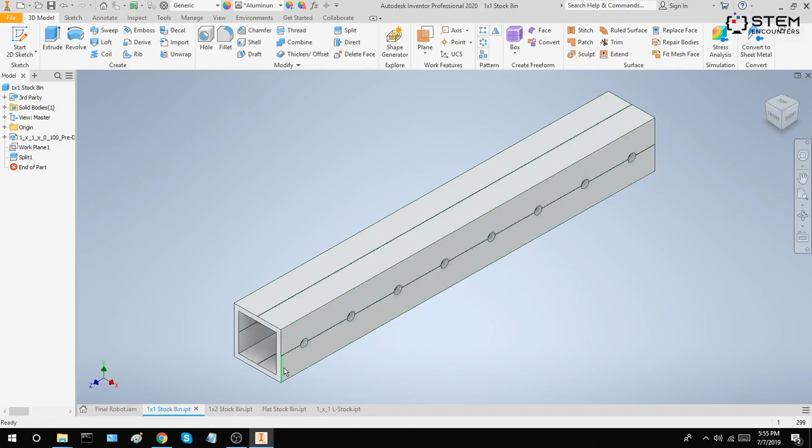There's also 1 by 2 stock, which is stock in a rectangular tube that's 1 inch by 2 inch. There's flat stock, which is a flat strip of aluminum with a little width of 1 inch. And there's also L stock, which is aluminum in the shape of an L.

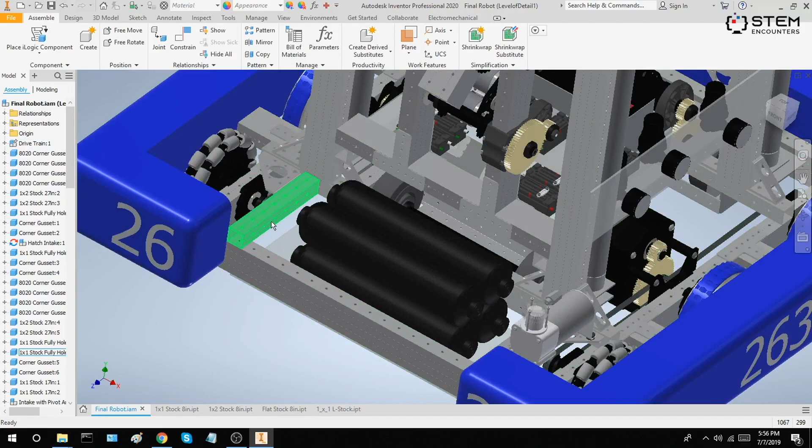Now, if you take a look at our FRC robot, you'll notice that a lot of the robot is made up of stock, because stock forms the structural basis of all of the robot's mechanisms. For instance, you can see here there's a piece of 1 by 1 or square stock. There's a lot of 1 by 2 stock for this arm pivot. And up here, there's more 1 by 2 stock. And you'll also notice that there are some pieces of flat stock here.

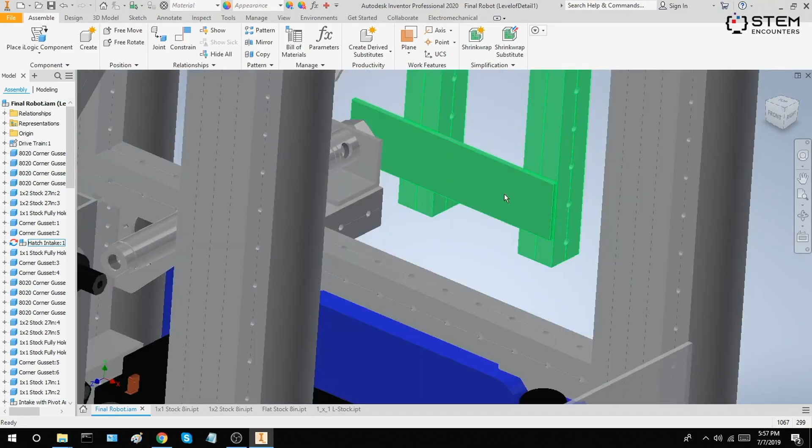To connect stock together, we use gussets, which are pieces of aluminum that can get bolted to 2 or more different pieces of stock to form a connection. You'll notice that these little holes in the gusset line up with the holes on the stock so that bolted connections can be made. There are many different types of gussets which serve different purposes.

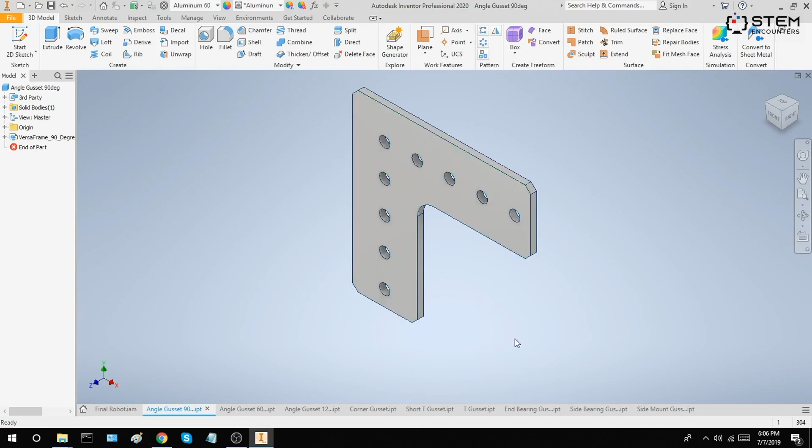This is an L gusset, or a 90-degree angle gusset, and this serves to connect 2 pieces of stock at a 90-degree angle. Head over to our robot, you'll notice that these 2 stocks are connected at a right angle by this L gusset.

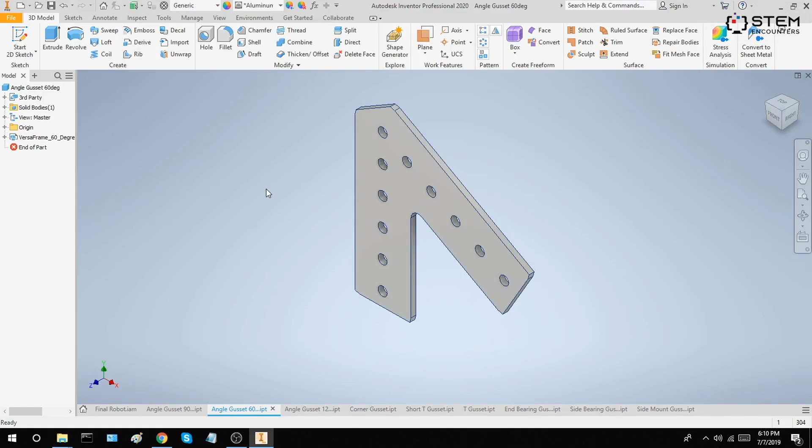Angle gussets can come in a variety of angles, anywhere from 30 to 150 degrees. This, for instance, is an angle gusset that is 60 degrees, and it connects 2 pieces of stock at a 60-degree angle, while this 120-degree angle gusset connects 2 pieces of stock at a 120-degree angle.

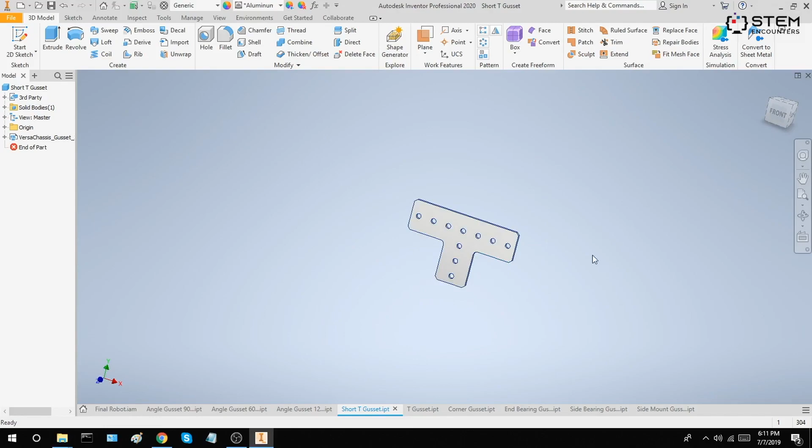Other structural gussets include T-gussets, which connect stock to form a T. This is a short T-gusset, and this is a long T-gusset. And you'll notice on the final robot, T-gussets are used in the drivetrain to connect stock to form a little T shape.

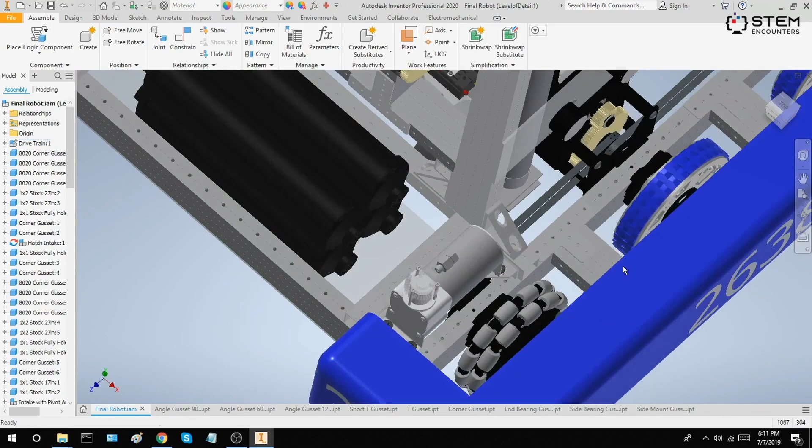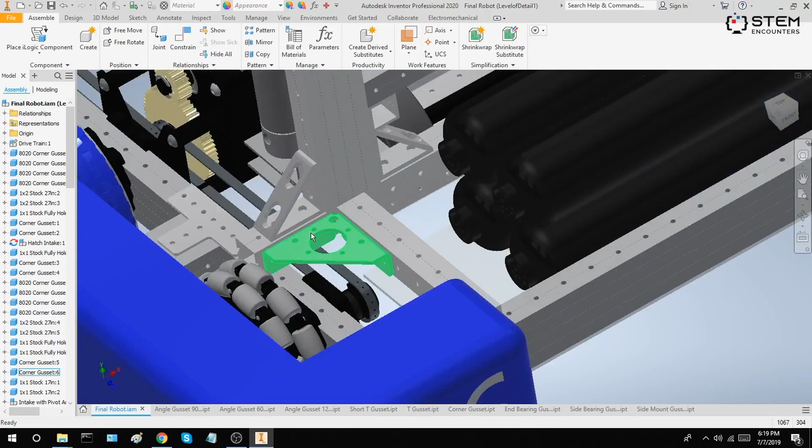A corner gusset, like a 90-degree angle gusset or L gusset, allows structural components to be connected at a right angle. In addition, this little hole here serves as a hole for bearings, which we'll go over. You'll notice on the final robot, for instance, in this area, these 2 stocks had no room to have an L gusset fit on top of them because of this, so a corner gusset was used to connect them, since these holes were facing inward.

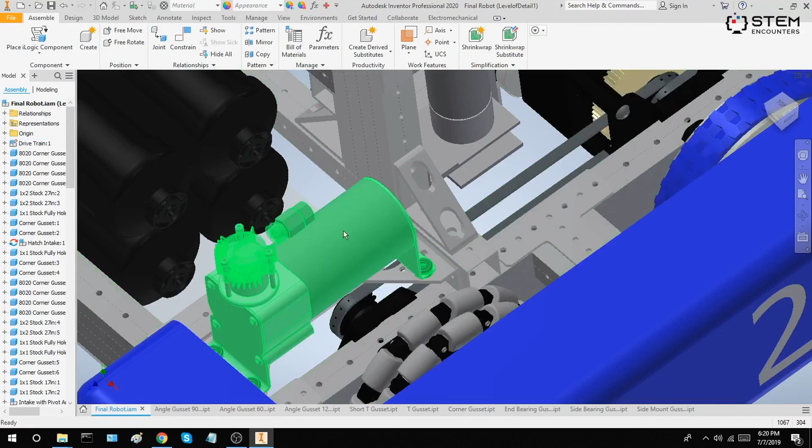In addition, the surface that the corner gusset provides, along with the little holes, allow other robotic components to be mounted on the corner gusset. For instance, over here you'll notice that the pneumatic compressor was mounted on the corner gusset.

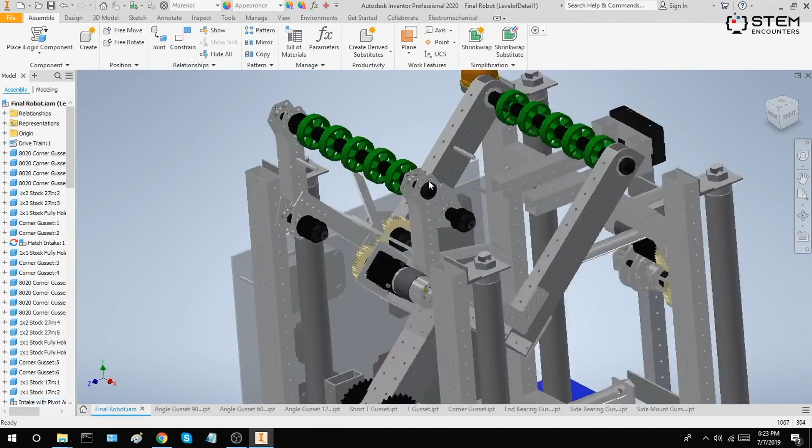Some gussets are also just dedicated to housing rotating components, mainly bearings. You'll notice that this hole in this end bearing gusset is similar to the hole in the corner gusset. And if you head over to the final robot, you'll notice over here, this shaft with all these green wheels has been mounted to the end bearing gusset, which is mounted at the end of a square stock.

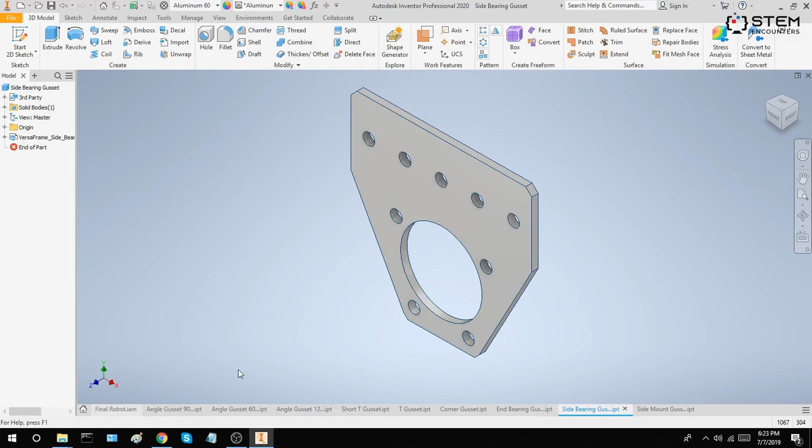A side bearing gusset is similar to an end bearing gusset in that it houses a bearing in its big hole, except that it mounts on the stock such that the bearing would come off the side of the stock. So over here, instead of the bearing and shaft setup coming off the end of the stock, for a side bearing mount, it would come off the side.

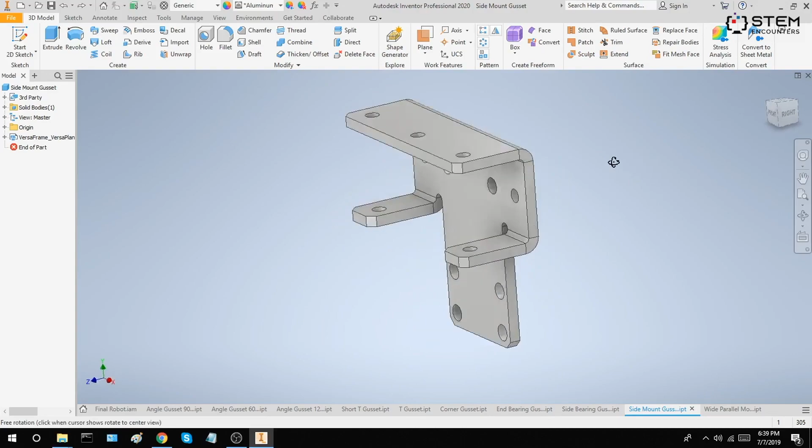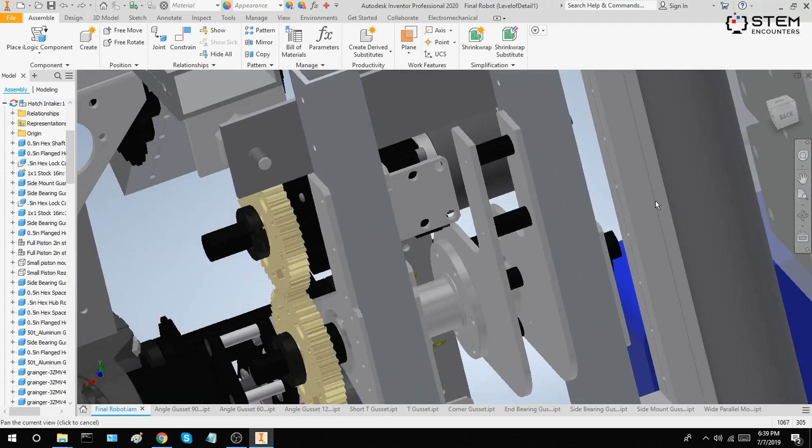There are also gussets that are dedicated to mounting motors. For instance, this VersaPlanetary side mount gusset mounts a motor on this face, and these little parts of the gusset hook onto a stock. So over here in our final robot, you'll notice that the motor here is attached to this piece of stock using a VersaPlanetary side mount gusset, which has its little tabs hook on to the holes of the stock.

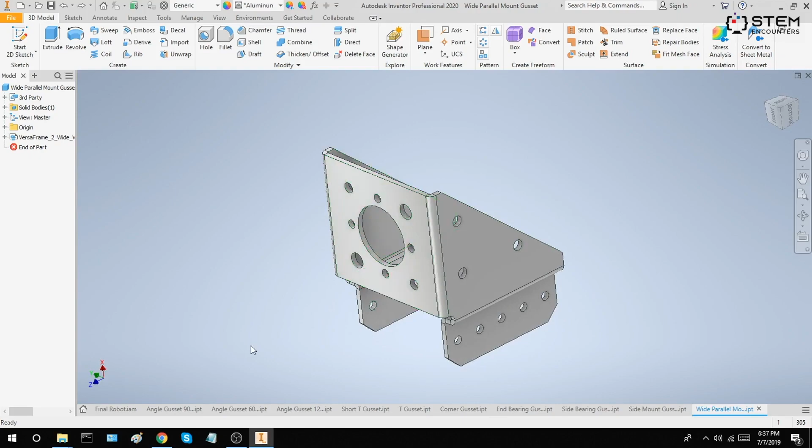There's also a VersaPlanetary parallel mount gusset, which also mounts motors to stock, except that the motor goes in such that it runs parallel to the stock. You'll notice here this little hole is for the output shaft of the motor to stick through. So, for instance, on our final robot over here, you'll see the VersaPlanetary parallel mount gusset with the motor running parallel to the stock that the gusset is mounted on.

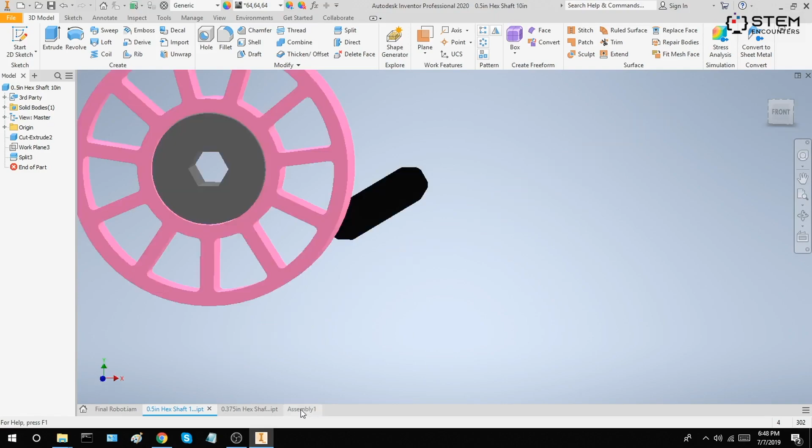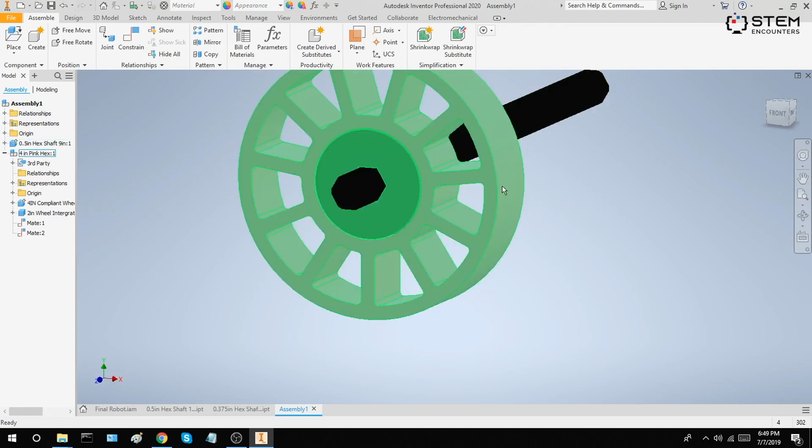Hex shafts are the axles of any rotating parts of your robot. In FRC, hex shafts are commonly used due to the fact that a hex shaft, when used with a hex hole, doesn't require any locking mechanism. So you see here I have a wheel with a hex hole, and if I put it with this hex shaft, you'll notice that because the holes fit right with the shaft, when this axle spins, the wheel will spin right with it without the need for any locking mechanism, as there would be if the hole and the shaft were circular. So you'll notice on our final robot assembly, hex shaft is used right here to form the axle of this rotating wheel component.

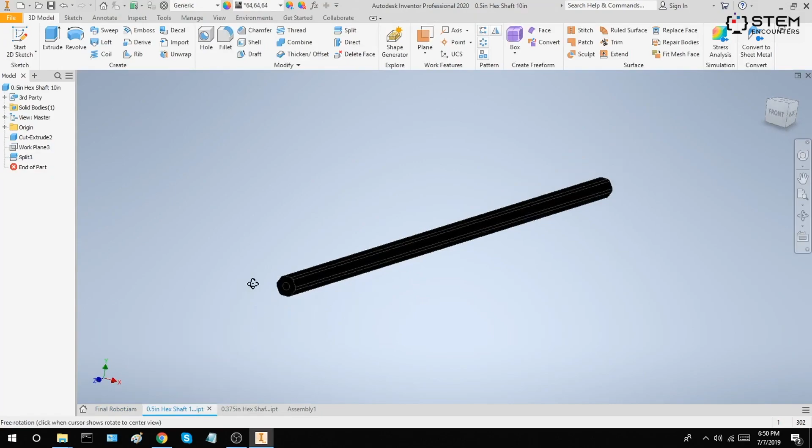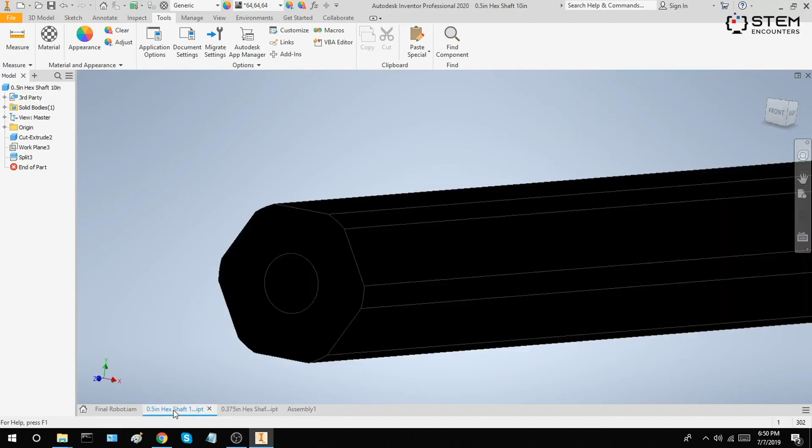And one more thing to mention is that this hex shaft is actually a half-inch hex shaft because the distance between two faces of the hexagon is roughly half an inch. And there's also a 3/8 inch hex shaft, which would have that distance being about 3/8 of an inch. But generally speaking, half-inch hex shaft is used more often on Team 263.

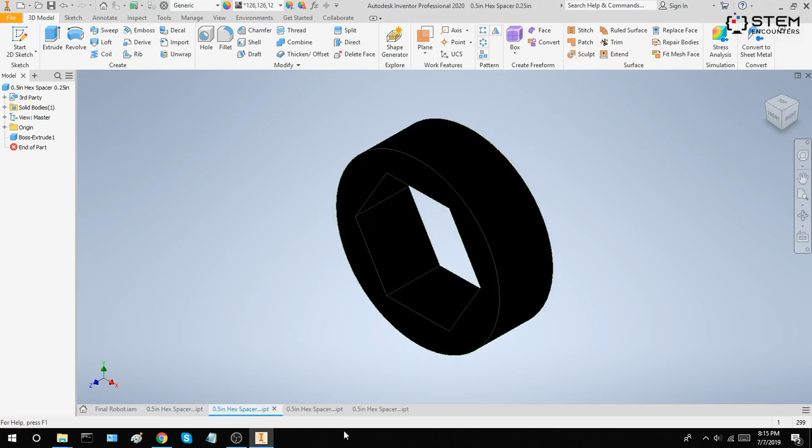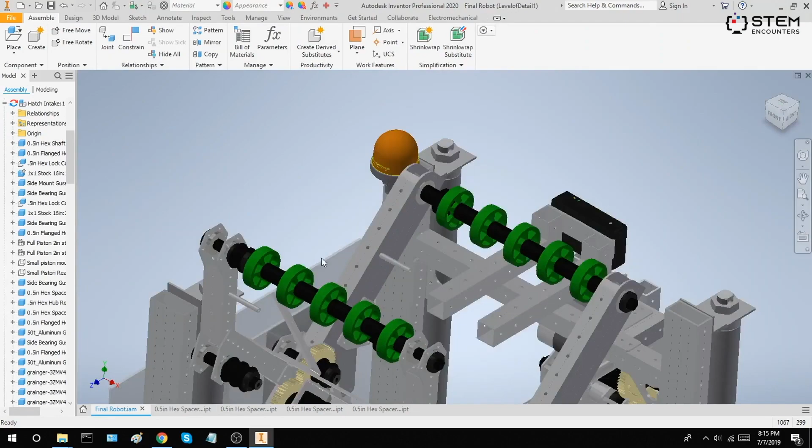So spacers are basically pieces that separate two other parts by a certain separation distance. Say, for instance, this is a half-inch spacer, so it would separate two pieces by half an inch. This is a 1/4 inch spacer, and this is a 1/16 of an inch spacer. So mainly for FRC, hex spacers are used. You'll notice that this spacer has a hex hole, and they're used on hex shaft to separate items on the shaft by a certain distance. So if you head over to the final robot, you'll notice that these wheels have spacers in between them so that they don't slide along and get closer or farther away from each other. They stay in place because these hex spacers kind of lock them in place by a certain distance.

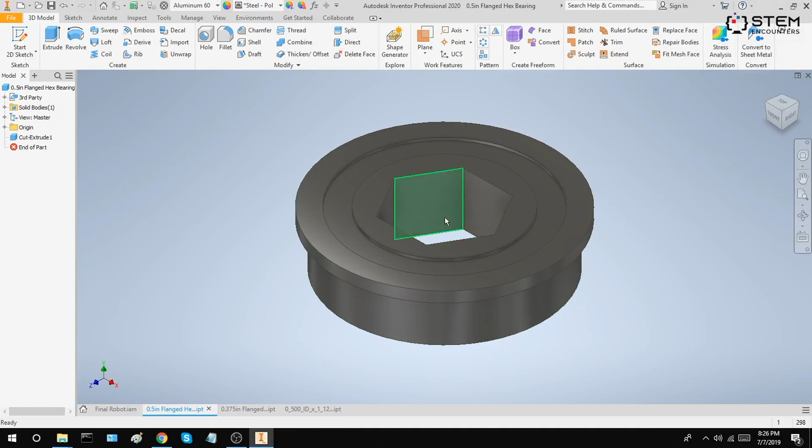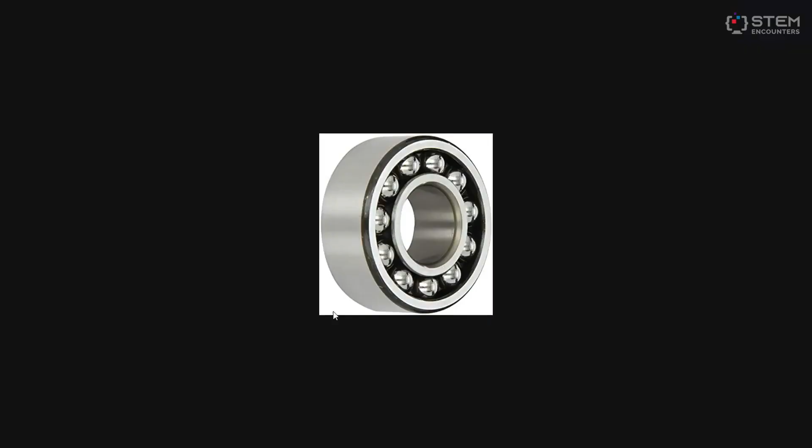So bearings are components that sit in a hole and house a shaft in here, and they basically reduce the friction between the shaft, which spins, relative to the hole, because a bearing is really composed of two parts: the inner part, which can spin freely relative to the outer part. You'll notice in this diagram of a bearing taken apart that the inside component is separate from the outside component, and they're separated by a bunch of balls, which allows the inner ring to spin really easily. And when you put a shaft through this, and you put the entire bearing in a hole, the shaft can spin really easily because of the reduced friction because of all these balls.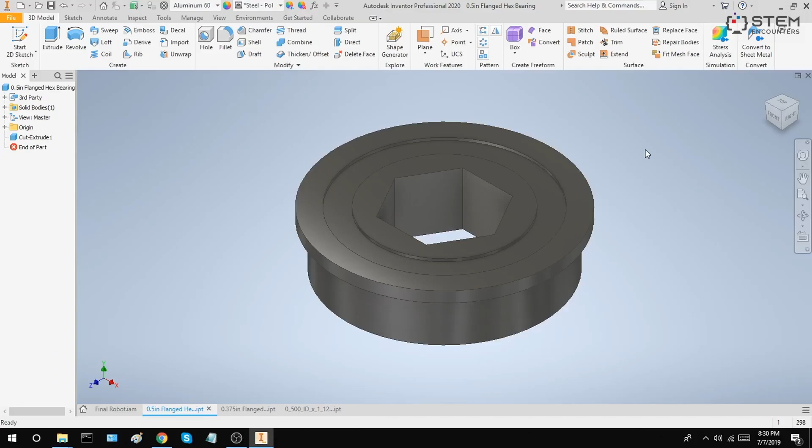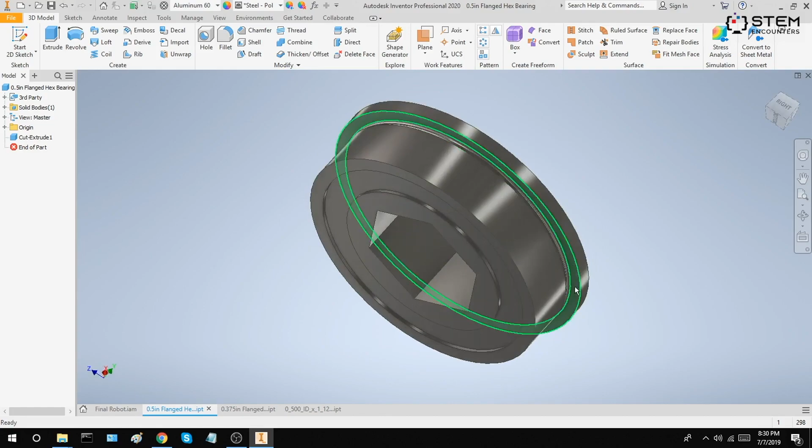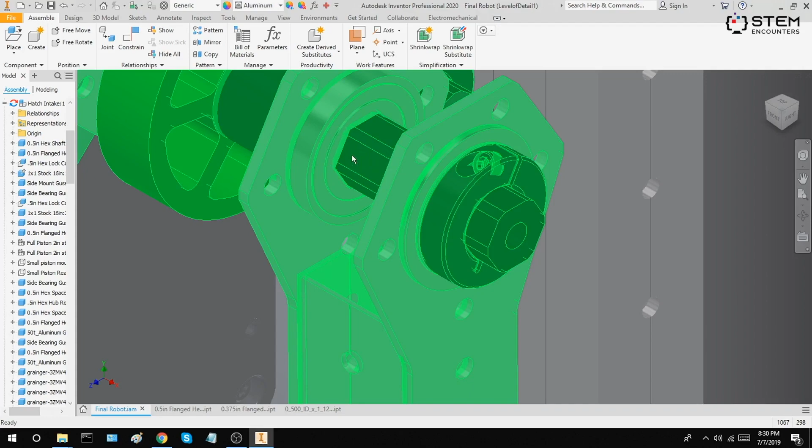Now the most common bearing we use on Team 263 is the flanged hex bearing, which, as you'll notice, there is a half-inch hex hole here, and the bearing is flanged, meaning that it has a little lip here that goes around the outside so that when this bearing is placed in a hole, the lip catches the surface of the hole so that the bearing doesn't fall all the way through. On the final robot, you'll notice by this side mount gusset, underneath this black component, there is a bearing here, and there's also a bearing on the other side over here. And the hex shaft sits inside the bearing, and it can rotate with much less friction because of the bearing.

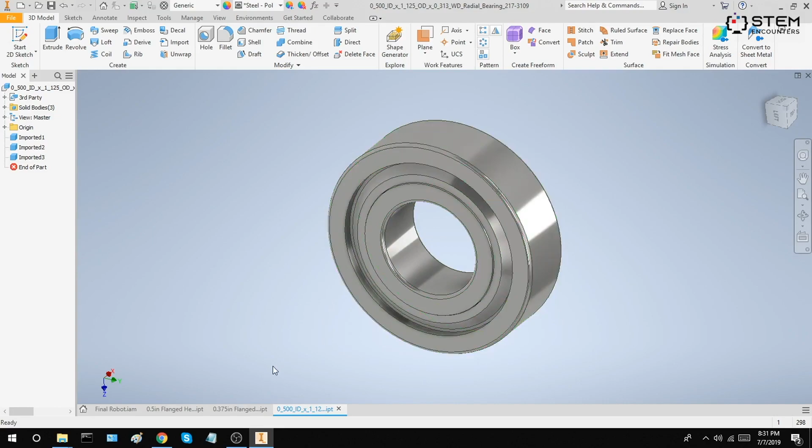There are also bearings that don't have a hex hole. For instance, this bearing has a 3/8 inch diameter regular hole, and there are also bearings that don't even have a flange, such as this bearing. You'll notice that it no longer has the lip that is the flange of the bearing. But most commonly used on our team is this flanged half-inch hex bearing.

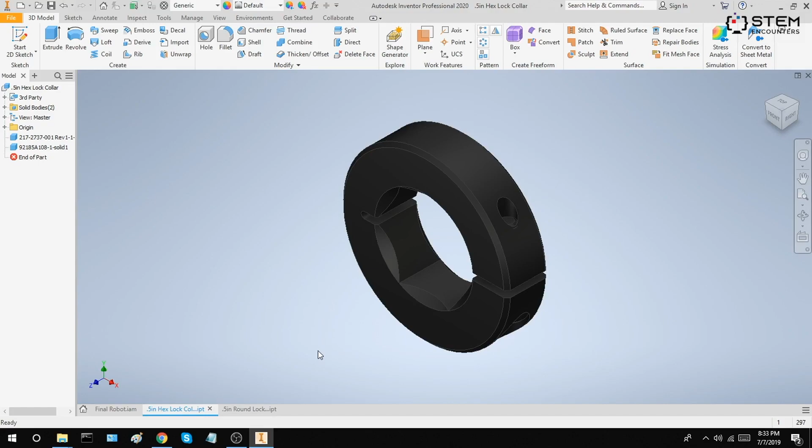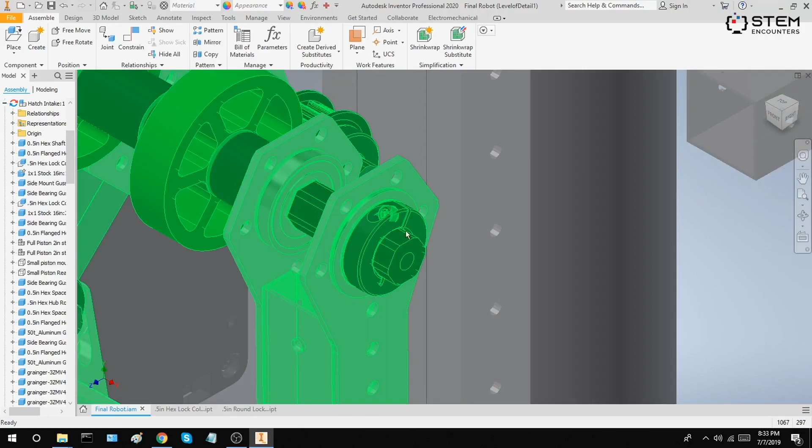Lock collars are little rings that sit on a shaft, and when tightened, they do not slide. So you can imagine that they can be used to sit on shafts and surround other components on the shaft, and when tightened, they'll lock those components in place and prevent them from sliding. There is a hex lock collar, which has a hex hole and sits on hex shaft. There's also a round lock collar, which sits on round shaft, but most commonly for FRC Team 263, we use the hex shaft lock collar. And you'll notice on the final robot, this shaft is surrounded by a lock collar on this side, as well as a lock collar on this side, so that the shaft doesn't slide out of the gussets that way. It's locked in place so that everything stays put.

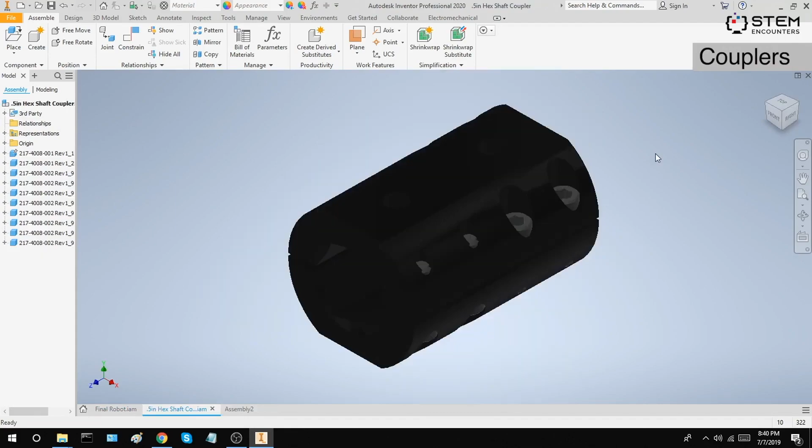Couplers are used to connect or couple two hex shafts together. And you'll notice that on the side there are these screws here, and when you tighten these screws, the coupler can lock onto two hex shafts.

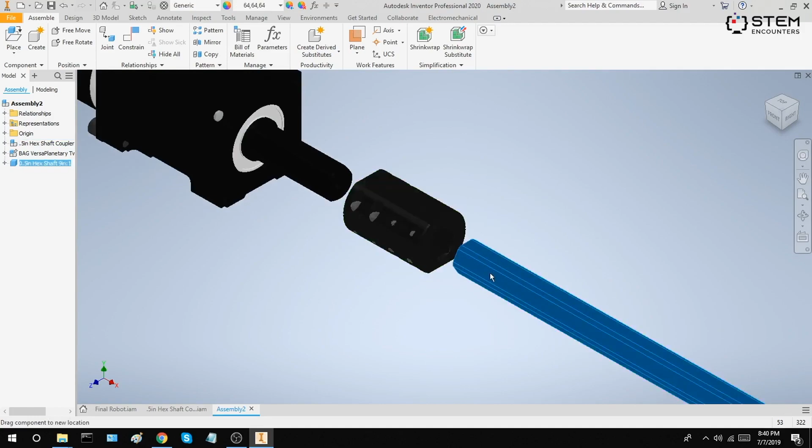So if you notice, I have a motor here with a hex shaft, and I have another hex shaft. I can stick part of the hex shaft into the coupler and the other hex shaft into the coupler, and when I tighten these screws, the coupler bites down on both of these hex shafts, and by doing that, this shaft is now extended in a way, because these two shafts are connected by this coupler.

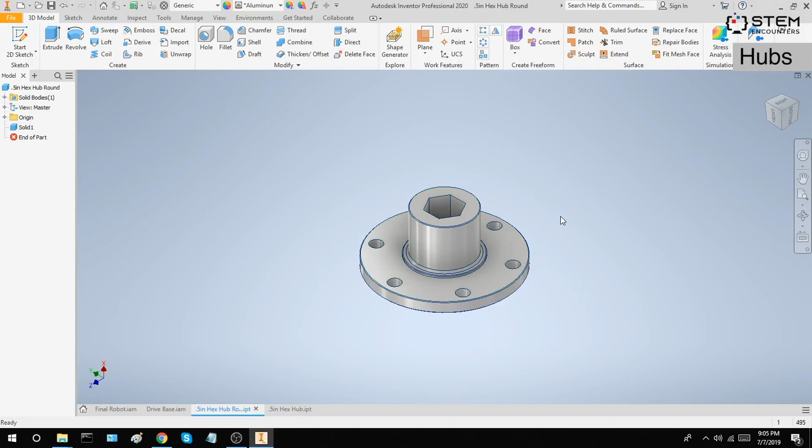Hubs are components that connect shafts to a bigger component so that the bigger component rotates with the shaft. You'll notice that this hub in particular has a hex hole for a hex shaft, and it has these mounting holes that can connect to a bigger component so that everything rotates together.

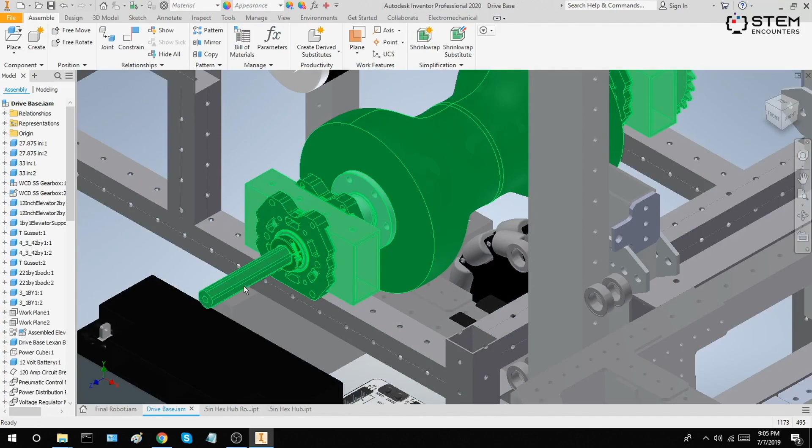This is also another hex hub. And over here you can see that this hex shaft connects to the hub, which connects to this yo-yo looking component, so that the entire yo-yo looking component rotates when the hex shaft rotates because of this hub.

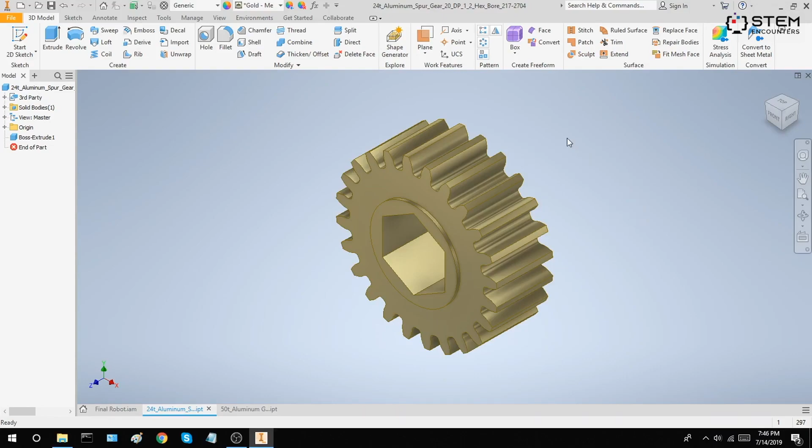Gears transfer rotation along different parts of the robot, and gears are placed on shafts, and their teeth are supposed to mesh with other gears to transfer rotation. And one thing to mention is that gears are identified by the number of teeth that they have. So, for instance, this is a 24-tooth gear, and this is a 50-tooth gear.

And on a robot, you can see that gears are used to transfer the rotational movement of this motor to the rotational movement of this arm. And you can see here on the robot that gears are used to transfer the rotation of the motor to the rotation of this arm.

Another good thing to mention is that gears meshed together will rotate in opposite directions. So for this motor, when it spins, let's say it spins clockwise, then this arm will rotate counterclockwise.

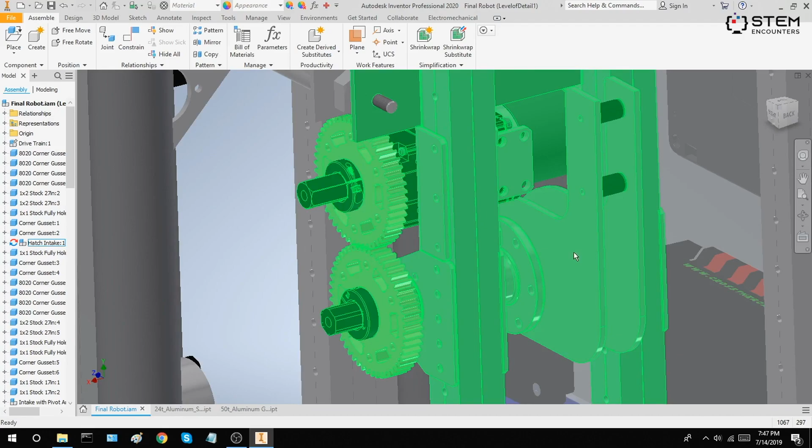Motors turn electrical energy into rotational movement. So for this motor, the electricity comes into these two wire terminals, and the motor turns that electricity into the rotational movement of this output shaft. There are many different types of motors that you'll be using in FRC.

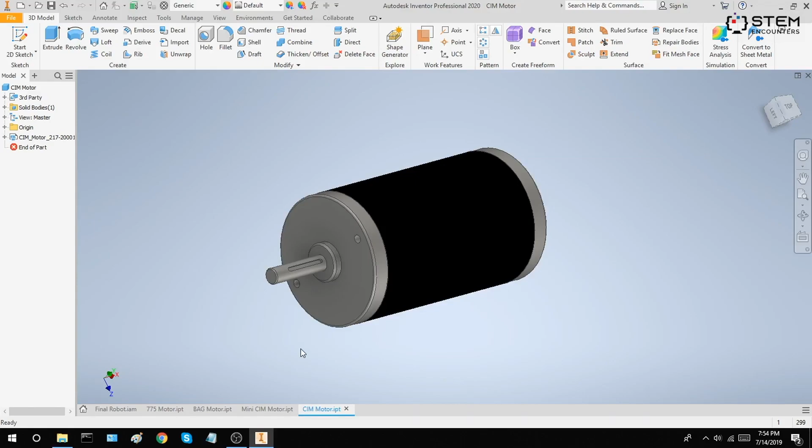This is a CIM motor, which is one of the bigger motors you'll use for any situation where you need a lot of torque or rotational force. This is a mini CIM motor, and this is a BAG motor, and those are used for situations where you need less torque or rotational force. This is a 775 motor, which is smaller than a CIM.

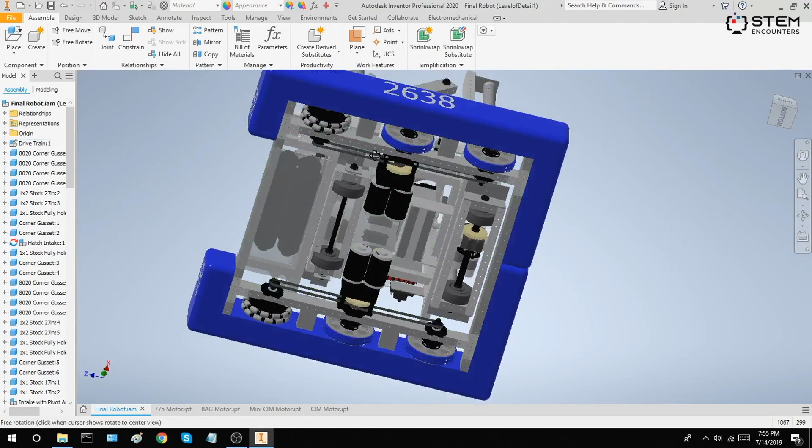You can see on our robot that there are motors everywhere because they power a lot of the mechanisms and a lot of the movement on the robot. Down here, you have many CIM motors, which are used for the drivetrain, which drives the heavy robot around, and motors are also used on our mechanisms. For instance here, the motor powers the rotation of these intake wheels. Back here, the motor powers the rotation of this arm.

A gearbox is a system of connected gears that can modify the torque or rotational force as well as the rotational speed between an input and output shaft. So generally speaking, the input would be the rotation of a motor shaft, and the output would be the shaft that connects to the rest of your mechanism. In using a gearbox, you can kind of make a motor more powerful, or you can make it spin faster.

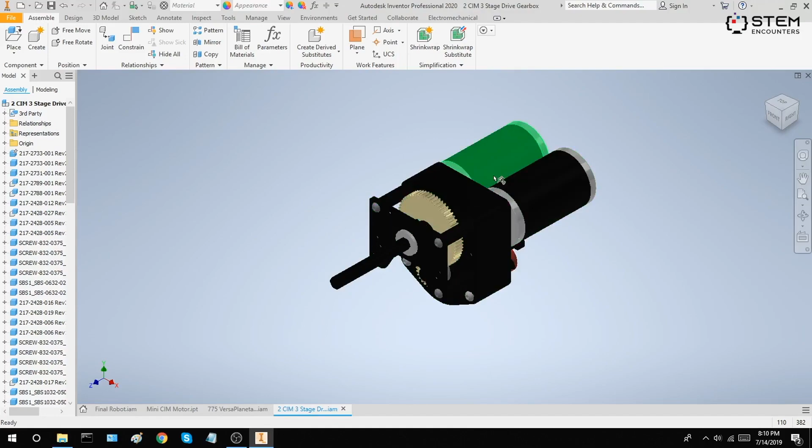There are many different types of gearboxes used for different situations. This, for instance, is a drive gearbox, which uses 2 motors and a really big gearbox. And this is used on the drivetrain of the robot. Since the robot is very heavy, a lot of power is needed to make the robot move around. This is a planetary gearbox, which is a smaller gearbox, and it's used to power a lot of mechanisms that don't require a lot of torque.

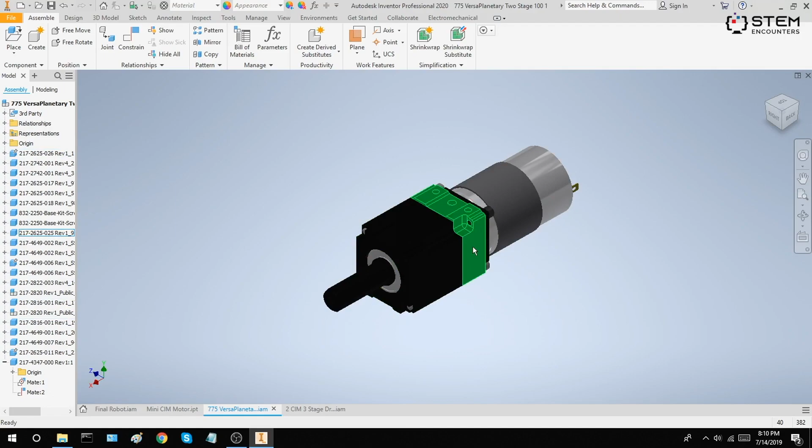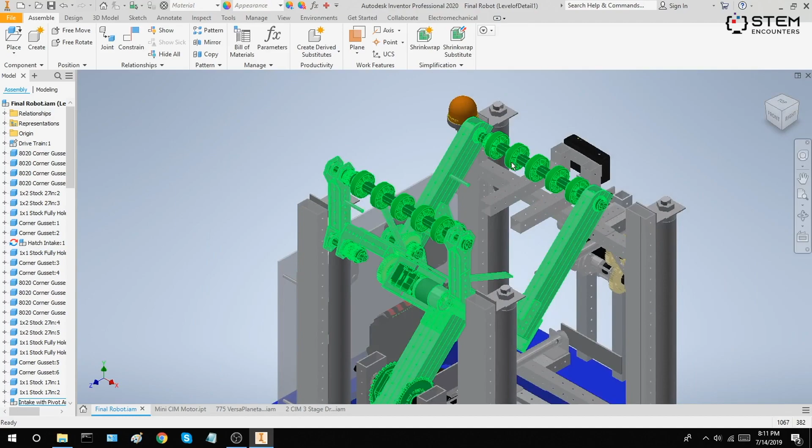Here on the robot, you can see that gearboxes are used all over the place. As I mentioned, the drivetrain uses a gearbox because the robot is very heavy, so a lot of power is needed to move the robot around. Additionally, a gearbox is used here to make these intake wheels spin at a certain power as well as speed. And a gearbox is also used here. It's very rare in FRC that you'll have a motor operating without a gearbox.

Sprockets are similar to gears in that they transfer rotational movement, except unlike gears, their teeth do not mesh together. Instead, sprockets work with chains to transfer rotational movement.

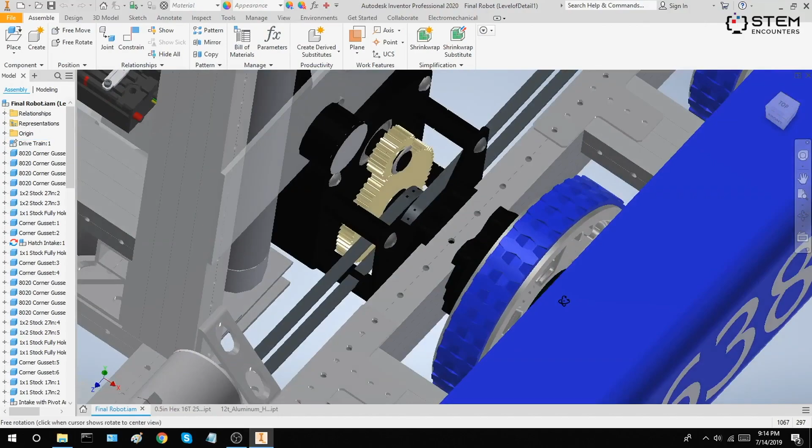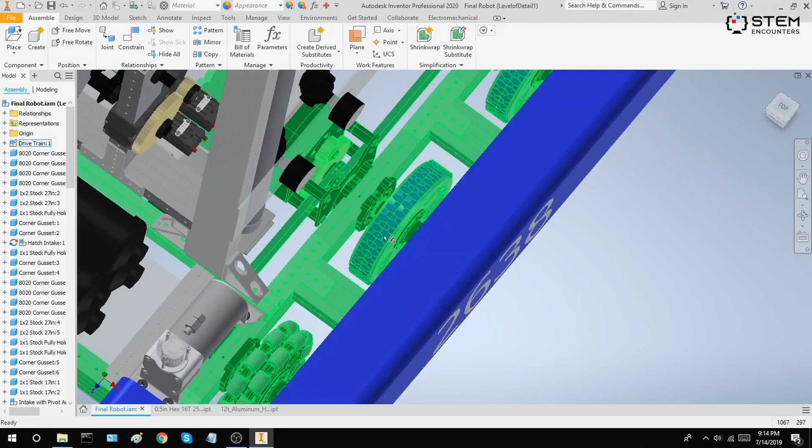If you look at our final robot, you'll notice on the drive base there is a sprocket system with chains, which is represented in gray, and they transfer the rotational motion of the center shaft, which is created by the motor. They transfer the rotational motion of that center shaft to the other wheels on the ends, so that when the center shaft spins, the other wheels also spin.

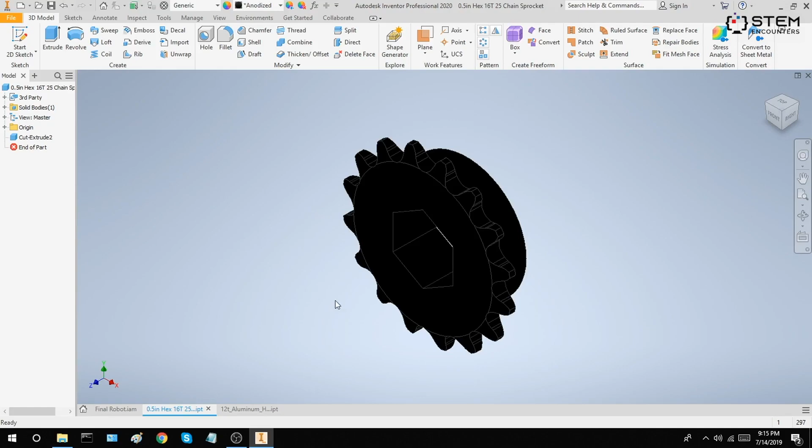Now there are different types of sprockets for the different types of chains. There's a 35 sprocket for a 35 chain, which is a thicker chain, and there's a 25 sprocket, which is for 25 chain, which is a thinner type of chain. And like gears, sprockets are named by the number of teeth. So this, for instance, is a 16-tooth sprocket.

Belt and pulley systems are similar to chain and sprocket systems in that rotation is transferred along different parts of the mechanism. And unlike gears, the pulleys do not have to mesh together. Now, in a belt and pulley system, the belt is usually a band of rubber, whereas in a chain and sprocket system, the chain is usually a metal chain.

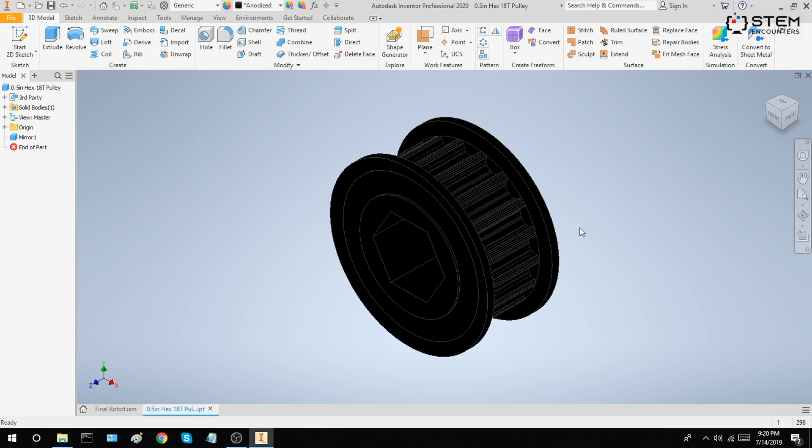You'll notice on our final robot here, for this roller intake, a lot of pulleys are used to transfer rotation from the motor to the intake wheels. One thing to point out is that the pulleys are represented, but not the belts.

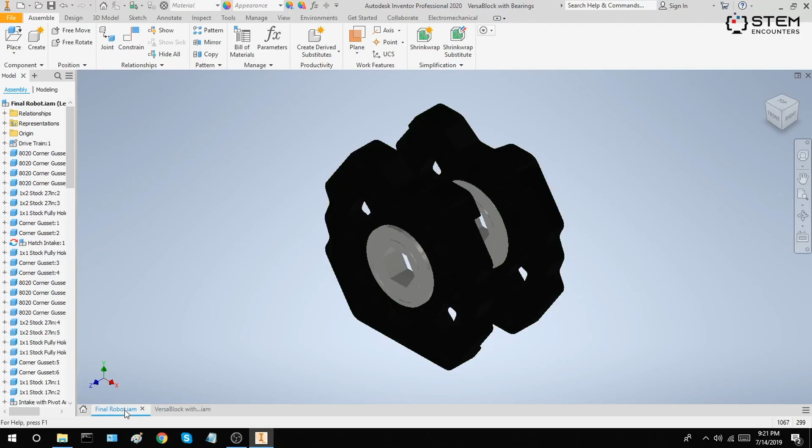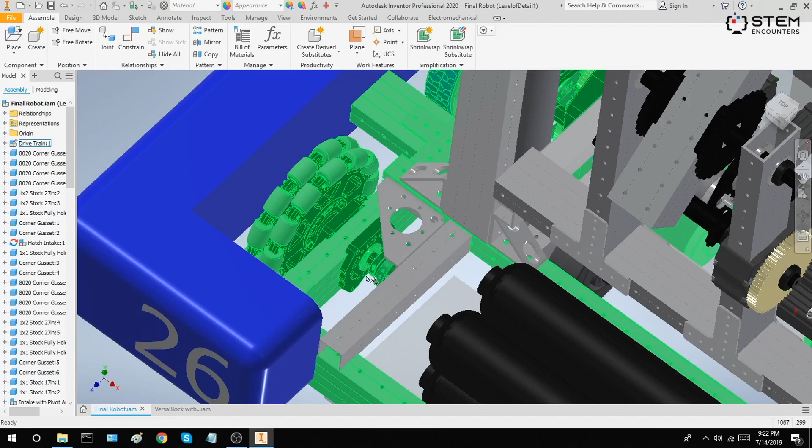VersaBlocks are basically attachments to 1x2 stock that simply house a shaft. So commonly they're used on drivetrains. As you'll notice in the final robot, a VersaBlock, which is right there, houses the shaft that goes through a hole in the 1x2 stock, and which attaches to the wheel. The ultimate purpose of a VersaBlock is to reduce the friction between the shaft and the rest of the robot, so that the shaft can spin freely inside the bearing.

An important thing to point out is that the orientation of the VersaBlock on the stock changes the height of the hole. So you'll notice at the center wheel that there is no flat surface of the VersaBlock, whereas at the ends, the VersaBlock has the flat side on top. When the VersaBlock is oriented such that the flat side is on the bottom, such as over here, and the ridges are on the top, the center of the hole in the VersaBlock is a bit lower than if the VersaBlock were oriented the other way.

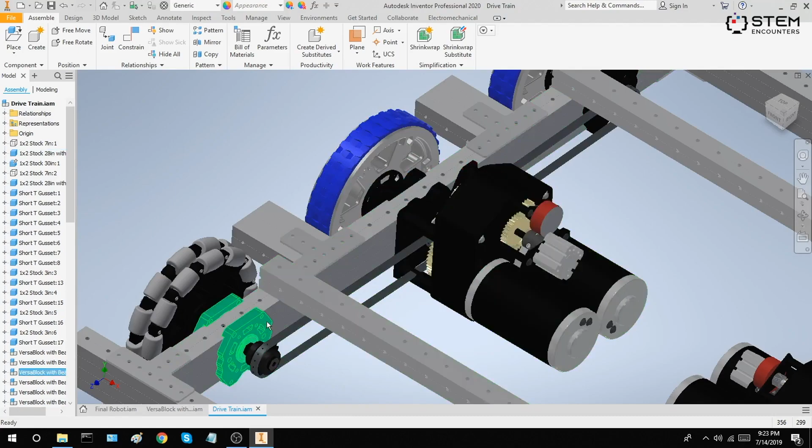So this means that overall, on the drivetrain, the center wheel is a bit lower than the other wheels. And really the main reason for this is that having a center drop makes it easier to turn and reduces the friction experienced on the ground.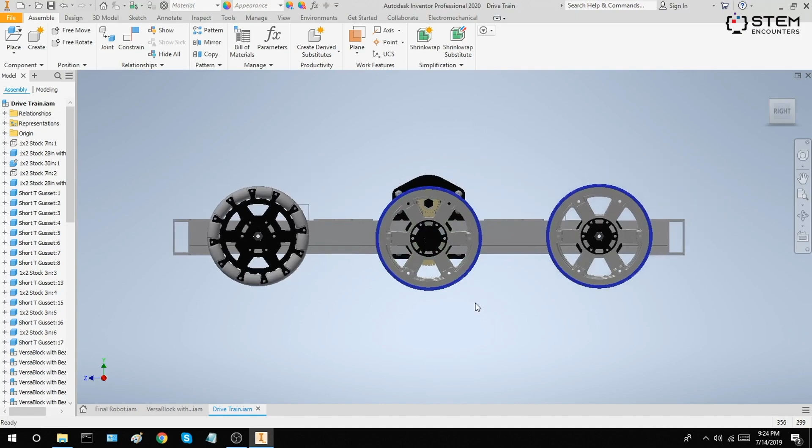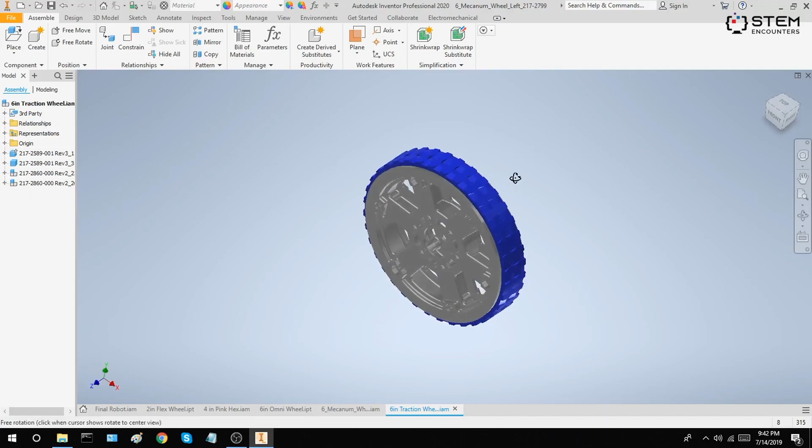Wheels have many different purposes in FRC, from uses on the drivetrain, on rollers, or on grippers, and many other mechanisms. There are many different types of wheels which serve different purposes. This, for instance, is a traction wheel, which is a drive wheel. It's what is used for the robot to roll around. So you'll notice on our robot, we have 4 traction wheels.

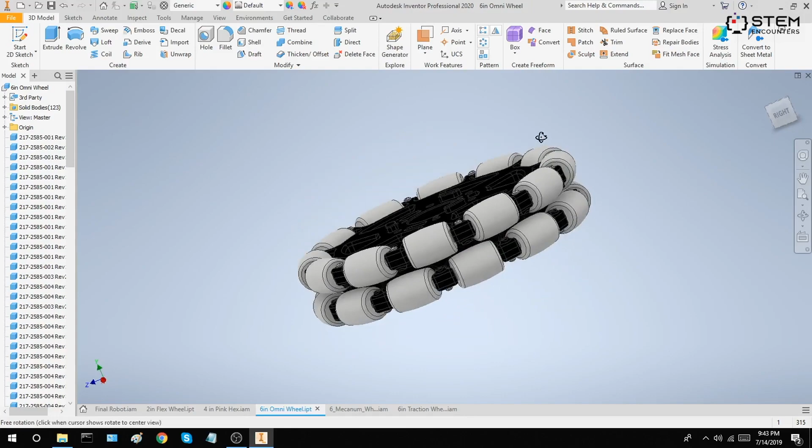Another type of drive wheel is the mecanum wheel, as well as the omni wheel, which are wheels that let the robot move in multiple directions. You'll notice on the omni wheel that from this angle, it looks like a regular wheel and it can roll around, but these gray parts are also little rollers themselves that can roll sideways.

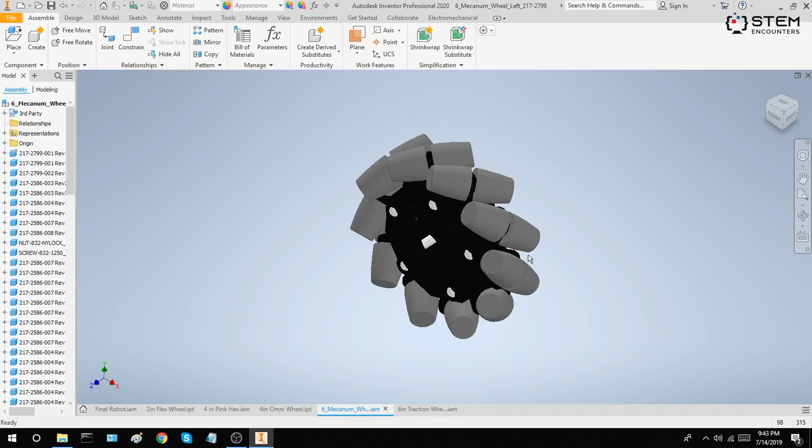Mecanum wheels are similar in that these little gray pieces can roll independently, which allows for a robot that uses mecanum wheels on its drive base to move in many different directions.

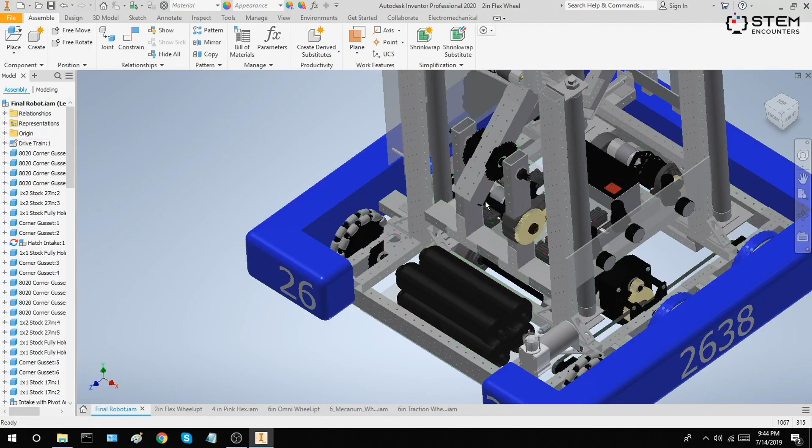There are also wheels that are used specifically for mechanisms, such as hex wheels and flex wheels, where a big portion of the wheel is rubber that can twist and bend. So for our robot, we used flex wheels on this roller intake, which would take in the ball cargo. We used flex wheels because they could compress themselves to accommodate for the ball getting intaked and squished.

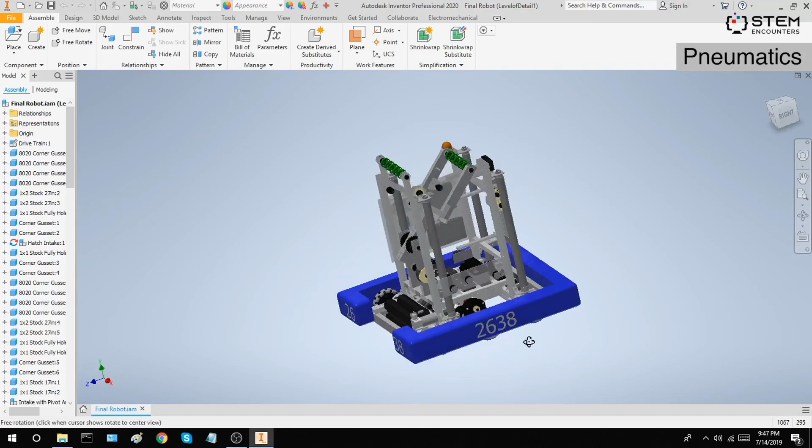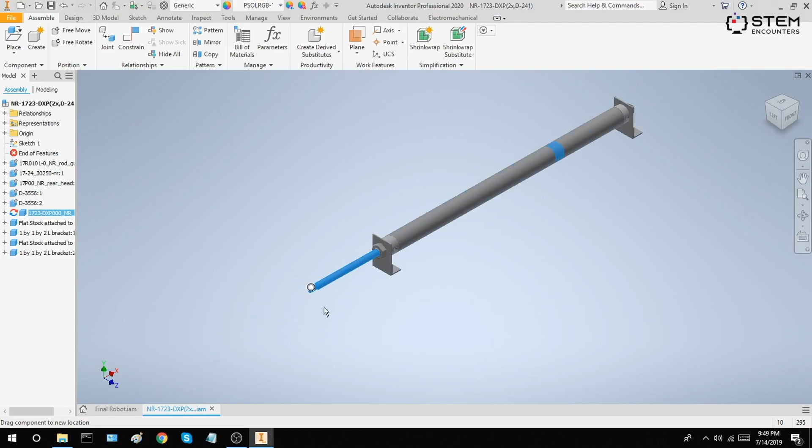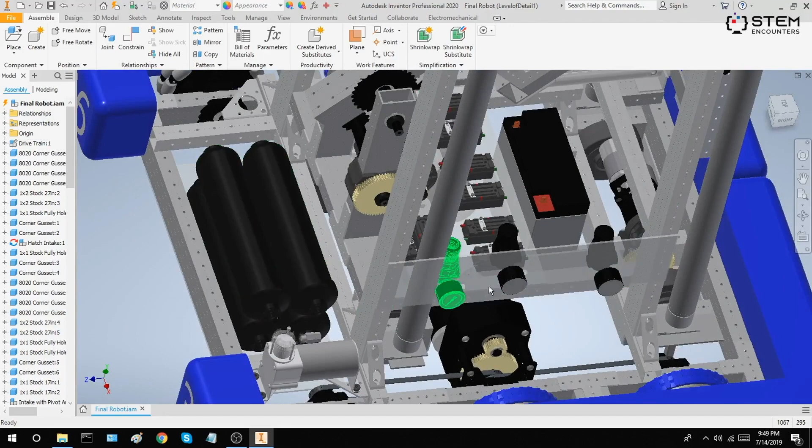The pneumatic system of the robot is an air-powered system that allows for movement of parts. This is a piston, which is a part of the pneumatic system. It's a tube that, when filled with air, the shaft here can expand, which allows for linear motion. And for instance, on our final robot, these 2 pistons here, when they're filled with air, allow this wheel setup to drop down and lift our robot up. In addition, some other parts of the pneumatic system include the compressor, air tanks, and pressure gauges.

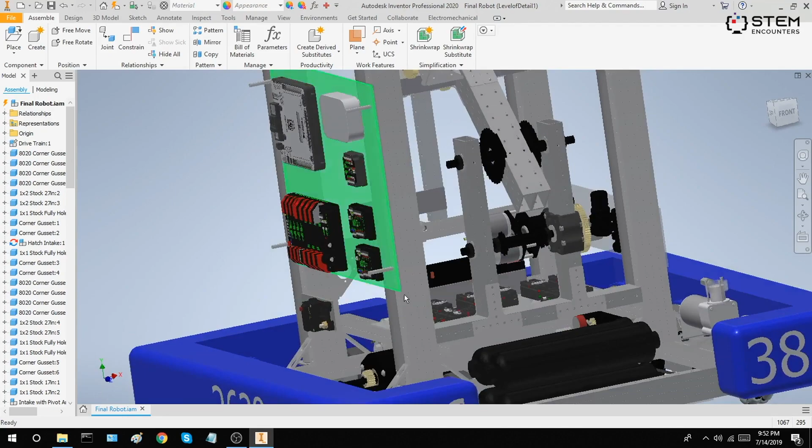Electronics are used to power different parts of the robot. Some electronic components include the power distribution panel, the RoboRIO, the radio, the voltage regulator module, the pneumatics control module, the main circuit breaker, the battery, and the motor driver Talons. Generally in CAD, we only put in the main layout of all the electrical components, but you'll notice that we skip CADing all the wiring.